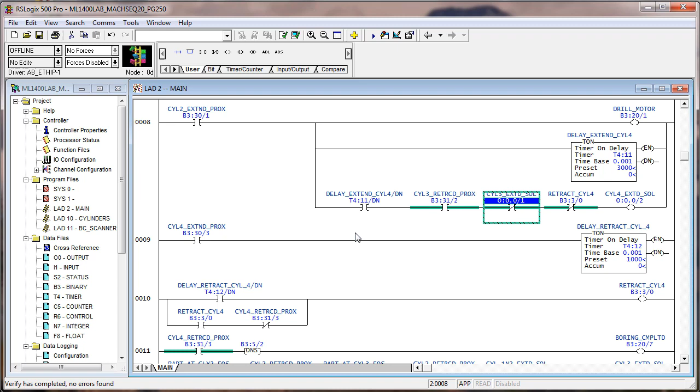So we start here with cylinder 4, and I've added these two instructions in there that say you cannot extend cylinder 4 unless cylinder 3 is retracted and the output is not turned on to extend cylinder 3. So that's kind of like double insurance. And then we also, up here for extending cylinder 1 and 2, you cannot unless cylinder 3 is retracted. And you could add in that cylinder 3 is not energized. You could put in and not output whatever cylinder 3 is. You get the general idea.

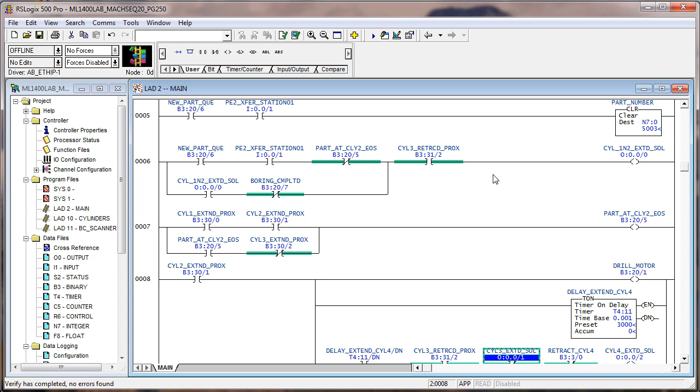So there's cylinder 1 and 2, there's cylinder 4, and here's cylinder 3. For cylinder 3, we have cylinder 2 has to be retracted and the output has to be turned off because one of these happens faster than the other. So if you were to turn on extend cylinder 1 and 2, you would instantly de-energize the solenoid for cylinder 3 and it would retract just as fast as this would come in and hopefully avoid a collision.

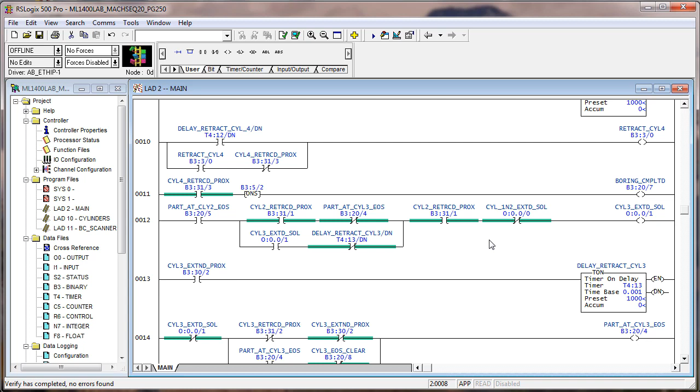Now in your logic, you shouldn't have any logic that should cause this. These are just little machine safeties that I typically put in. As a matter of fact, I do that first before I do anything else. That way when I go out on the shop floor, I'm not bending things in the machine and having the operators and maintenance guys go, oh, he really knows what he's doing. Save yourself some grief. Just do that stuff right away before you even go out there. That way, if the sequence doesn't work, at least the cylinders won't be extending and running into each other.

Let's give this thing a whirl. First, let's roll through here and see if anything is turned on. Well, the finished product conveyor is turned on, and that's because the downstream call B3:20/3 is on. Now it's off. And we extended solenoid 5, which is fine. Okay, so everything seems to be clear.

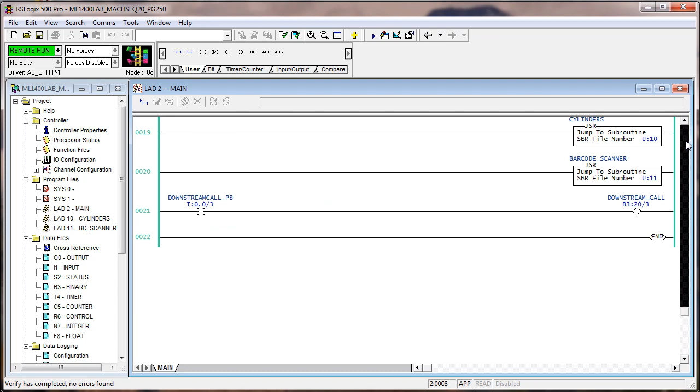So we're going to use our poor man's HMI here, and we're going to say that we see a part. We got a new part Q, and now we're waiting for photo eye 2. So the new part Q cleared out before we hit photo eye 2. Well, that's good because that's what we wanted it to do. So let's go in here and put in photo eye 2, because that's a clue to help us remember how to do the sequence.

So let's try that again. Well, we know the first part works. If you don't push that part off the conveyor within 10 seconds, it clears it. So we got a new part Q. We hit PE. We push the cylinder in. It's at the end of stroke. Cylinder 2, drill motor's on. I turn off PE2. We retracted. Boring was complete. I knew you wouldn't see that. Part at cylinder 3 end of stroke.

And it's still there. And guess what we're waiting for? I mean, it's right there in front of us. Finished product conveyor is running, right? And cylinder 5 is extended. It was before we started. So we're waiting for PE3 to come on. So let's turn on PE3.

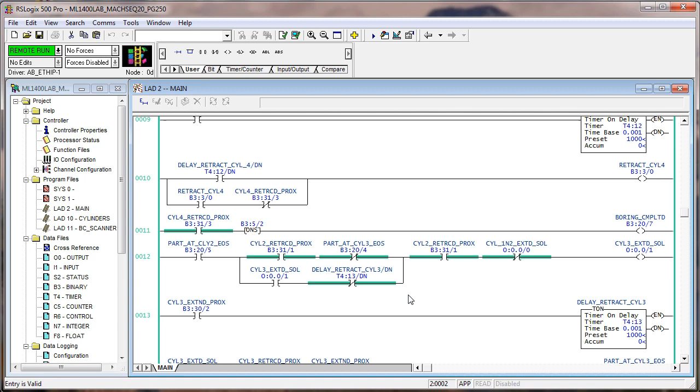Now, let's go look to see where the part's at. Okay, this is our clue right here. True if off, that means that PE3 is on, which it should be. So I should go back up here then and add that in here. And I see now that's why I probably had that in there. So I'll go to this rung.

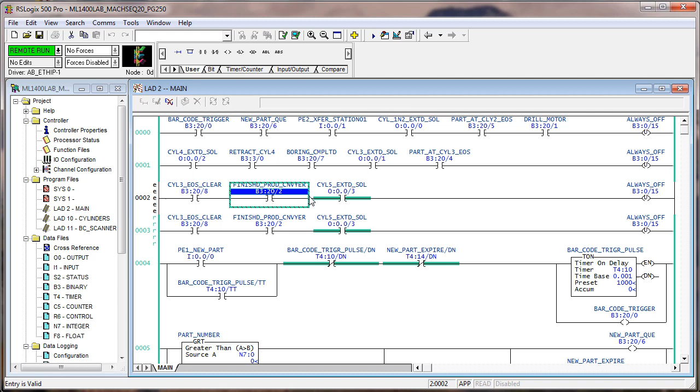We cleared it at end of stroke. Finished product conveyor is running. It's extended. So I'm not sure whether I want to put it after or before. So I'll just drop it in there. PE3. You notice how that nifty display comes up, and when it highlights what I want, I just hit enter, enter. It's done. Okay. So let's accept this.

And we have a part at PE3. Now remember, you're controlling the photo eyes. That's the real challenge here, is to get this to work right, but to get you to work right too. So we got a part at PE3, right? So let's try another part.

So we flip on photo eye 1. We got a cue. Then PE2 sees it. It pushes it in to cylinder 2 end of stroke, drill motor on, 4 extended, retract 4, boring's completed. We extend cylinder 3, part at cylinder 3 end of stroke.

Okay? Now, it really can't go any further, because if we have a part at cylinder 3 end of stroke and a part in front of PE3, then we got 2 parts on the finished product conveyor, right? And we got to get rid of this one right here before we can let that one move on. So let's just go down there and look.

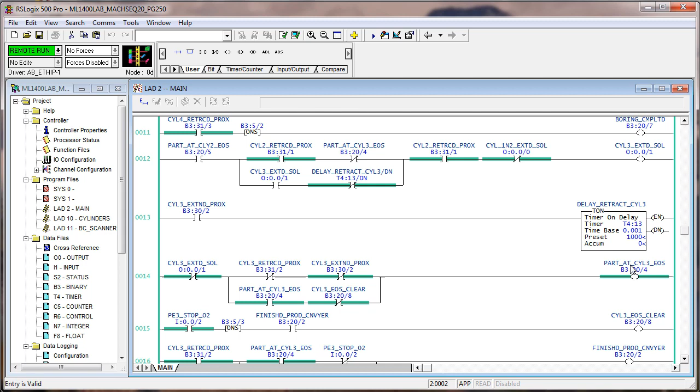See, part at cylinder 3 end of stroke, and then we have PE3 blocked. You can tell because this is true of off, and because it's on, it's false. Okay, so we got 2 parts in there. Let's try a third part and see what happens.

So we block photo eye 1, and I forgot to turn off photo eye 2. See, I screwed it up. So I don't know if it'll work right now or not. So we got a part at cylinder 2 end of stroke, even though I screwed up my photo eyes. In other words, I left on PE2 from the second part. And fortunately, it worked out okay anyway.

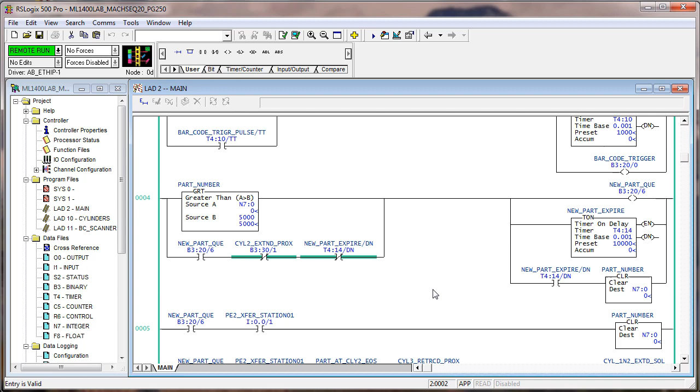So I see now I have 3 parts in here. I have a part at cylinder 2 end of stroke, a part at cylinder 3 end of stroke, and a part in front of PE3. That's basically the way the thing's supposed to work. Let's see, finished product conveyor. We don't have downstream call in here, so let's put that in here.

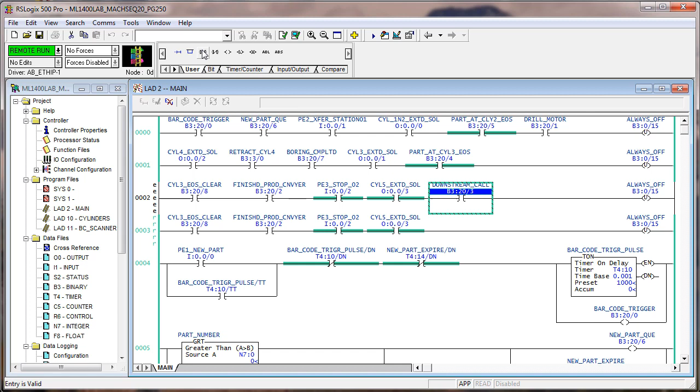You see the nifty little thing comes up, the type forward downstream call, it's highlighted. Enter, enter, and it's in there. The downstream call, we've got that operating off of input 3. So if I turn on input 3, what would you expect to happen? I would expect cylinder 5 to retract and release that part. So we'll see what happens.

Okay. So input 3, we turn on the downstream call, cylinder 5 retracts, and now we have to turn off PE3 because it left, right? It's on the moving conveyor. And now the finished product conveyor is running, right? The part at cylinder 3 end of stroke, it's now moving to PE3.

So if we turn PE3 back on again, and it's still calling, see, it cleared it. And it let the part that was at cylinder 2 end of stroke now go to cylinder 3 end of stroke. And when we clear PE3, as it's moving downstream, finished product conveyor is running, we turn PE3 back on to say that the part has arrived there, which means it's no longer at cylinder 3 end of stroke.

And it moves right on through for the downstream call. As long as we have a downstream call, we've got the finished product conveyor running. And that, folks, is how she runs. Next, we're going to do a little modification that doesn't really change the sequence so much as makes it a little bit more real world-like.

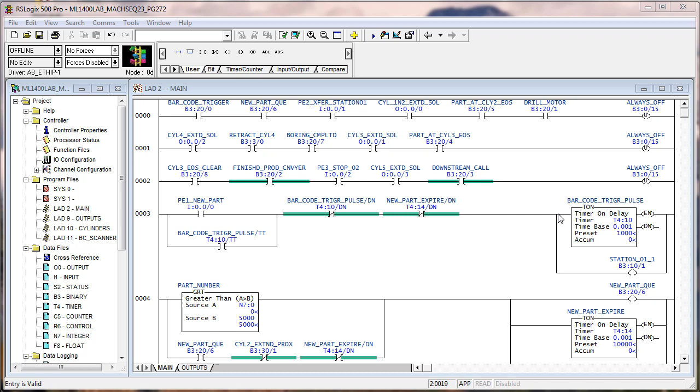I added a branch around. Remember, the timer timing pulse is keeping this sealed in for 1 second, so this would be on for 1 second. We went back to the B310 bits, but we're not latching them. They're just there. They're labeled station 1, step 2, so forth. As long as the timer timing is holding this on, it's also holding that bit on.

If we go to our new routine outputs, if we're in the auto mode and that bit is on, then we trigger the barcode reader. If we're in the manual mode, then a touch object on the HMI or a button on the HMI, when pressed in the manual mode, will do the same thing. So we could test our barcode reader from the HMI.

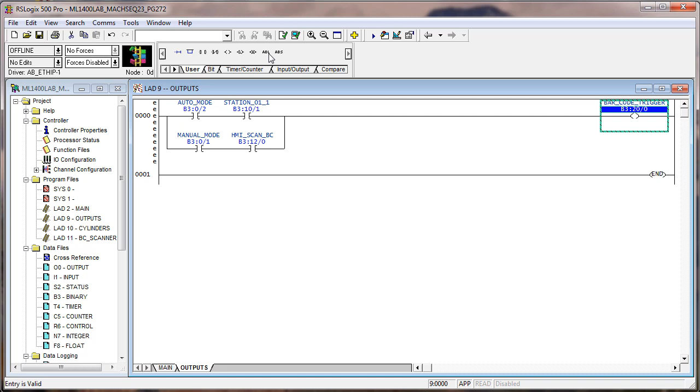Now we don't have an HMI and we haven't added the logic to create auto manual mode yet. Finalize that and go back to the main routine to do the next one.

The next one to change would be to move this output function to the output file. So we have to place in here a bit that we're going to use in the auto mode. So we're going to use B310 and then go to the output file and we add this rung. Notice these two rungs are basically identical.

Keep in mind that B320/0 would actually be a digital output, except for the fact we don't have enough outputs on our controller that are wired up to do that. So that one remains B320/0, but this one is now output 0. So when station 1, 2, B310-2 is energized, in other words, we replaced an output with this B310-2.

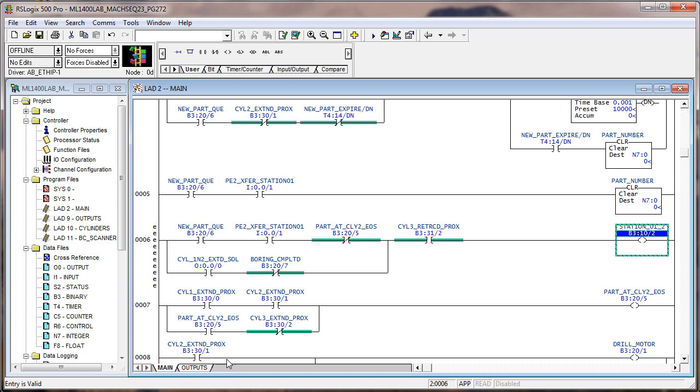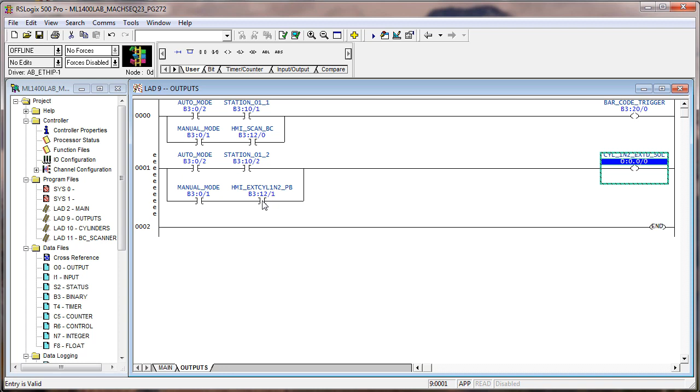In the auto mode, it will turn on that output, or in the manual mode, we have a new bit that's associated with something different on the HMI screen. This was B312-0, this one's B312-1, and it's connected to an object on the screen that would say extend cylinder 1 and 2. It wouldn't say push button, it would just say extend cylinder 1 and 2. So we'll finalize that.

And then we had you create another new routine called sensors. I think we use ladder 8 for that. We're going to put our virtual sensors in that routine. Finally, we made a whole bunch of changes. We added the sensors routine, and in the sensors routine we put the rungs that had to do with the end of stroke sensors, the virtual sensors that don't actually exist.

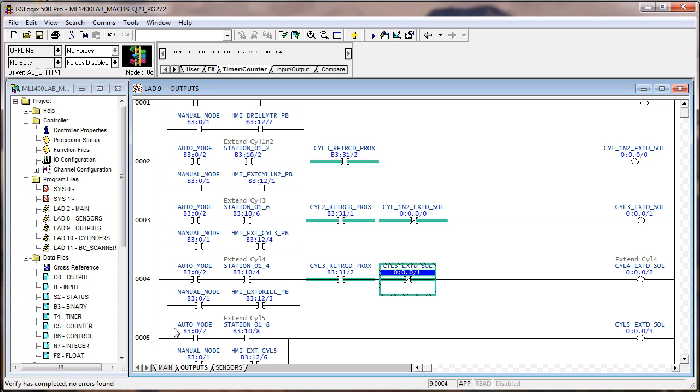We moved the machine safety conditions into the output files instead of having them in the logic. That cleans up the logic a little bit. In other words, these are the instructions here that prevent you from extending a cylinder if something's in the way. And in general, we went through and cleaned up some things. We put in a timer to turn off the conveyor if nothing's happened.

Let's say that we were running the finished product conveyor, which we would be right now. Keep in mind that we're offline. But if we were online and cylinder 3 is retracted, there's a downstream call, and T416 is not timed out, then the conveyor would be running.

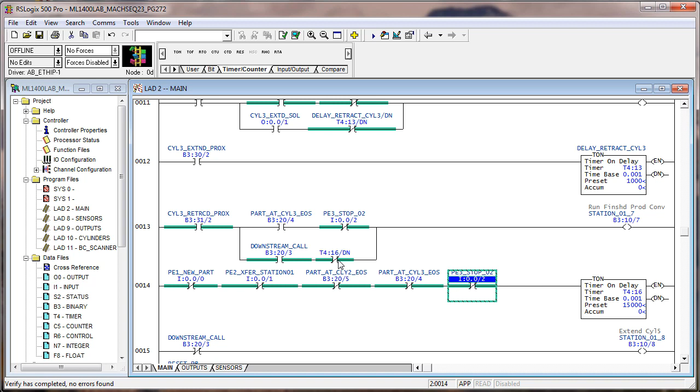But 15 seconds later, if nothing had interrupted input 0, PE1 new part, or PE2, or showed up and sitting at end of stroke cylinder 2, or sitting at end of stroke cylinder 3, or arrived at PE3, after 15 seconds of that, this would go false and turn off the finished product conveyor. What gets it running again is any of these conditions go false, this resets, that goes true, and the finished product conveyor starts up again.

So there's probably more that could be said about this code. The reason for doing the output file, now remember that the barcode trigger would be a digital output and the finished product conveyor would be a digital output. Drill motor, we made that an output because we had output 4 not being used, so I kind of just switched it over. But here's the deal.

Anytime you get called out to a machine to do maintenance on it, it's going to be because something didn't do something. The operator will say, well, it just stopped. Well, what's it not doing? What's it waiting on? They look in there and they see that there's a part ready to be pushed out onto, we'll say, the finished product conveyor, and there's not one already sitting there, so it should push it out. You see one sitting in front of photo eye 3.

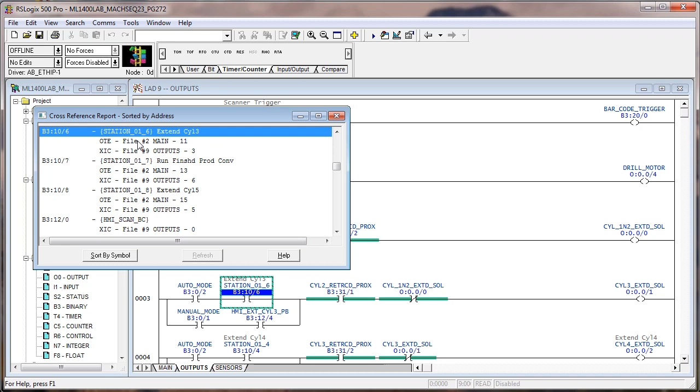So you go in here and you look to see why cylinder 3 didn't extend. None of this has anything to do with anything other than this single bit right here. You would be in the auto mode. You'd be looking to see why B3:10/6 did not energize. To do that, you right click on it and hit cross reference. Then you go look for the OTE. It's in rung 11 of the main file. Double click on it. It takes you right to that bit.

So here would be the logic that tells you why cylinder 3 didn't extend. Well, it's saying that, we're offline, so this is almost irrelevant, but it's saying that there is no part at cylinder 2 EOS. Well, if there's no part sitting at the end of stroke cylinder 2, there's nothing to push out. So it's not going to push out.

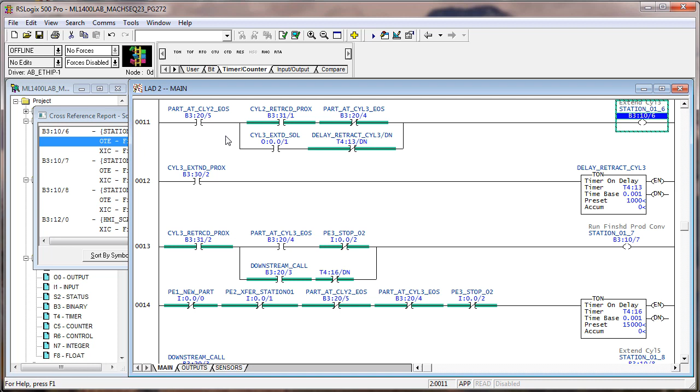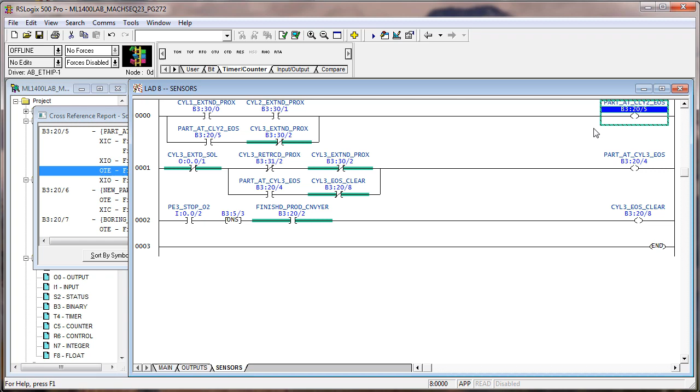Okay, so let's say you look in there and you see a part sitting in there. Now you're going to say, okay, why didn't this turn on and extend cylinder 3? So you right click on this, go to cross reference and go to the OTE for that memory location. Go to sensors and you can say, so it's saying that these two aren't met. In other words, cylinder 1 and cylinder 2 are not extended, therefore there was never a part. So you see what I'm saying? You go to the output file, you find out what's not happening, and then you work your way backwards.